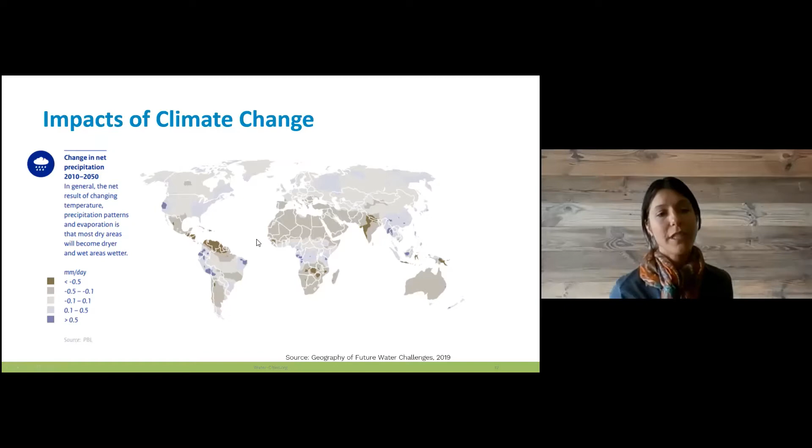Generally, the consequences of climate change are too much water, too little water, too dirty water, and increased needs for cooling and well-being of people in cities.

The three challenges of secure, livable, and sustainable growth cities, together with the three paradigm shifts of limited resources, growth and densification of cities, and the need to embrace uncertainty, are all addressed as a whole in the principles for water-wise cities. The IWA principles for water-wise cities are the expression of thought leadership of IWA members and beyond.

Water and urban professionals who summarized a shared vision of what sustainable urban water is. The principles now create a common language to share and learn faster across countries. Locally, the principles are being used to rally urban stakeholders around a shared vision on sustainable urban water, to strengthen the collaborative actions across disciplines and scales, and sometimes also across political parties.

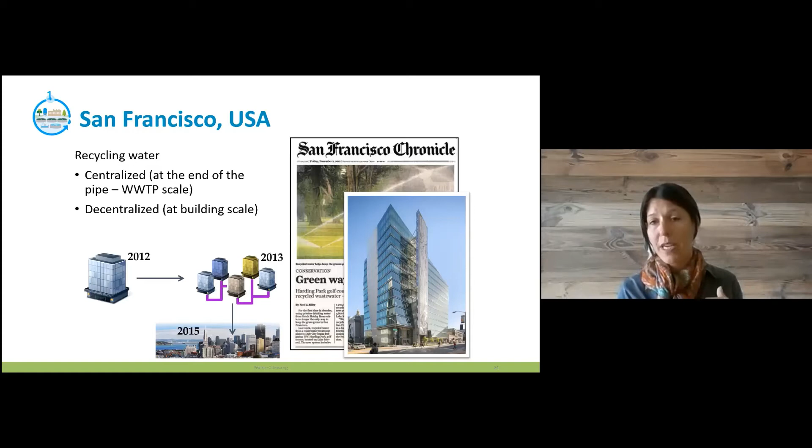And they've published a purple pipe and gray water recycling manual that is available now for all land developers working on new buildings. With this mindset of diversifying their resources, they're implementing rainwater and gray water recovery for non-potable uses, both at small and large scale. Recycling and rainwater harvesting on new large buildings has required the development of a whole new building code and collaboration with regulators to make the regulations evolve.

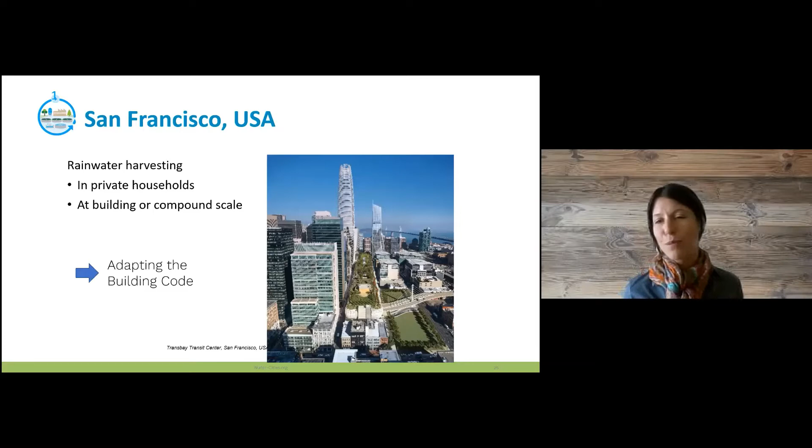We see that these strategies require us to rethink the way we design our buildings in cities, which naturally brings us to the second level of action. That second level of action is about thinking the way we design our cities in a way that allows us to embrace water as a resource for survival, for the essential needs, but also for well-being.

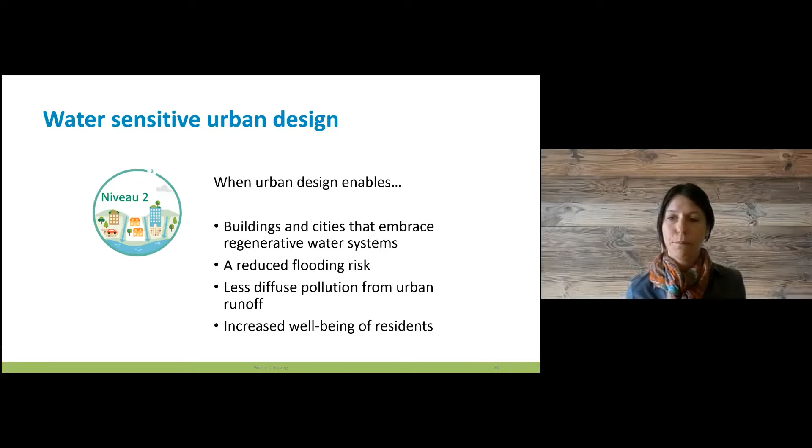Continuing our world tour, I'd like to take you to Sydney. The utility is an integrated water and sanitation utility serving 4.3 million people. Their challenges are population growth, declining water sources, and urban heat and flooding.

It's on that last point that I'd like to focus this example today. Sydney is facing the growing problem of urban heat and flooding. In response, they have developed their blue-green strategy which reduces heat and flooding and increases the well-being of residents.

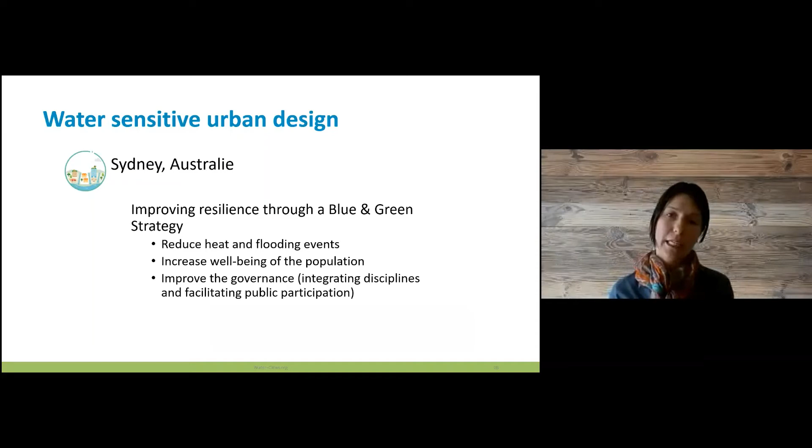It's divided into two complementary axes. The green corridors, whose overall objective is to increase the planted areas to decrease the urban heat. And the blue corridors, whose role is to support these green corridors and to increase the presence of visible water in the city. Now, visible water is important because it creates cultural and social connections.

And the well-being of the residents, of the population, relies on those opportunities. So water plays a role way beyond its cooling effect in the well-being of people, in the scenery it creates for people, and the sense of belonging to a place.

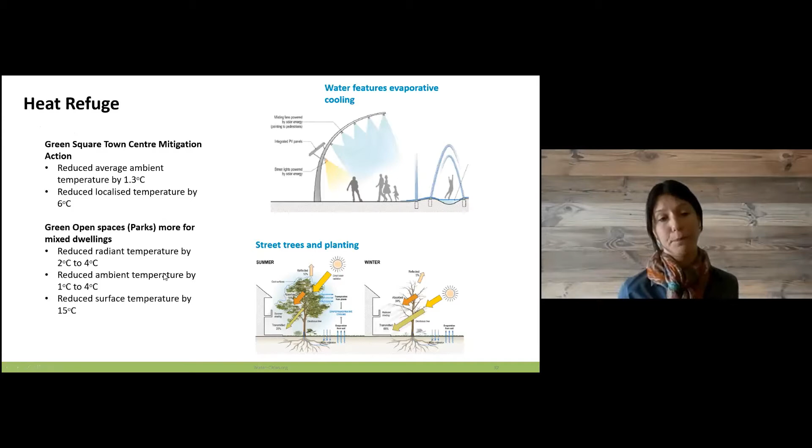And this is what it looks like in pictures. Now, to allow for so much green space in the context of a limited resource, the city has developed rainwater storage for park irrigation during dry periods. This rainwater storage also helps reduce flooding and limit stormwater overflows, which in return helps improve the water quality of the bay.

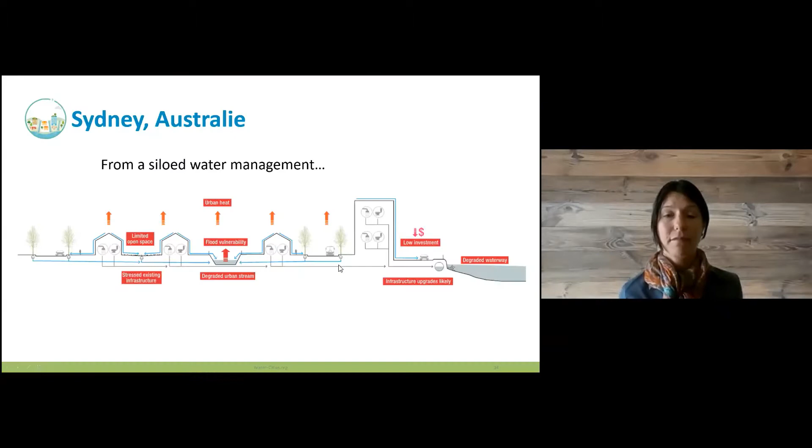Sydney is transitioning from the traditional silo approach to an integrated approach they call water-sensitive cities in Australia. It's about putting water at the heart of urban development and taking into account all the co-benefits that water management can bring. This type of approach allows increasing well-being and security in relation to flooding and water scarcity risks.

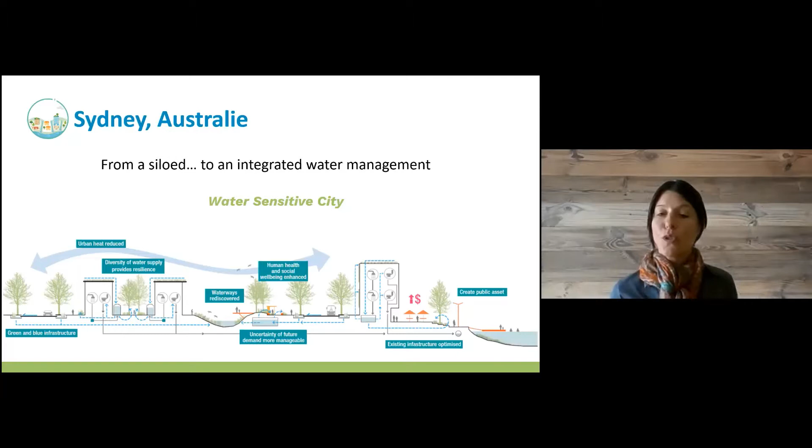But to truly ensure safety from water-related risks, the city must work hand in hand with its basin, which brings us to the third level of action.

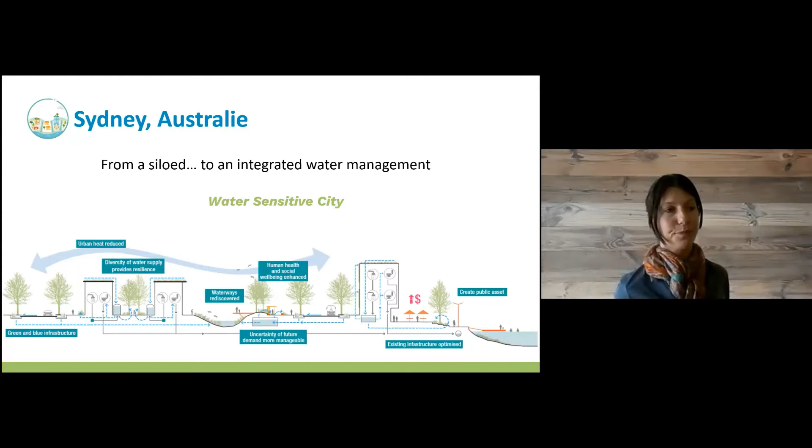A basin-connected city is when a city fully accounts for the capacity and water usages within its basin. That enables a better sharing of the resource, a better anticipation of the risks of lacking water or flooding, and it enables preserving the quality of the resource.

To illustrate this level of action, I'd like to continue our world tour and take you to Cape Town in South Africa. The utility there is a water and sanitation utility and serves 4.3 million people. Their challenges are population growth, informal urbanism, water resources highly dependent on rainfall, aging infrastructure, and social issues such as poverty, inequality, unemployment. But today, I'd like to focus on the dependency on rain for their water resources.

I propose that we go through what Cape Town had done to put in place some mechanisms before their 2018 drought, which we all still have in our heads, and then what they've also learned as a follow-up from this drought.

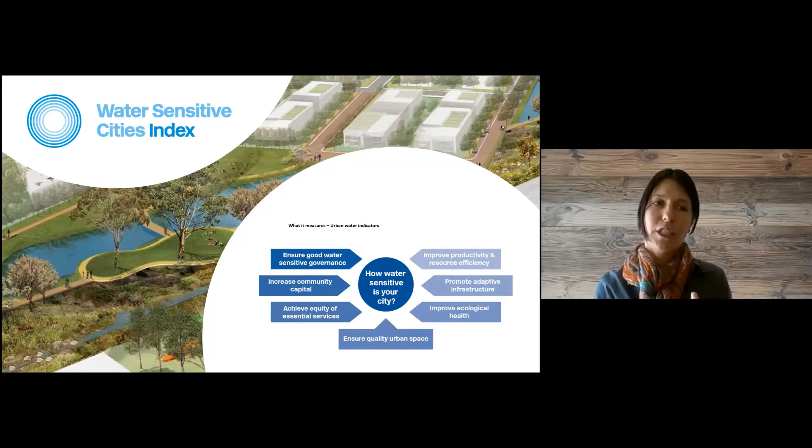Now let's move on to the Water Sensitive Cities Index. This index is articulated around 7 pillars: ensuring good water governance, increasing community capital, achieving equity of essential services, ensuring quality of urban spaces, improving ecological health, promoting adaptive infrastructure, and improving productivity and resource efficiency.

They started developing that framework based on the urban water transition phases concept. If you've already listened to some Australians presenting, you might have seen that graphic before. It's about thinking that our cities have evolved from being water supply cities back in the 19th century to water sensitive cities today, or trending to be water sensitive cities today. This evolution is the result of a series of social and political drivers listed at the top of that graphic, and the result is that we build different types of infrastructure in response to those drivers.

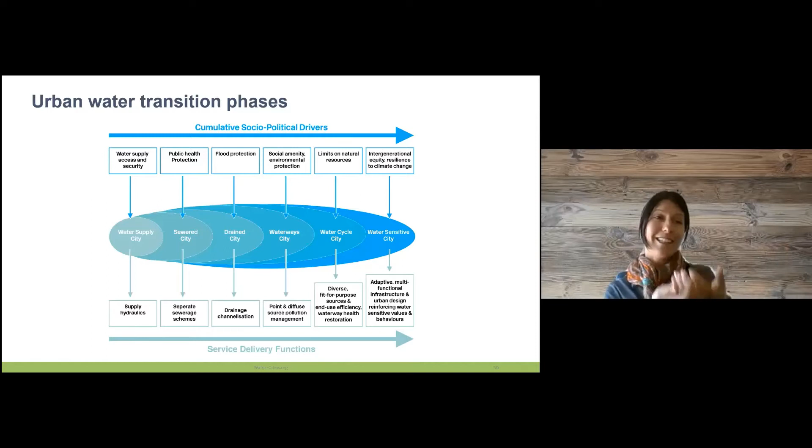And so the aim of this index, the Water Sensitive Cities Index, is to inspire change both in the social and political drivers, so that we build infrastructures that deliver water sensitive cities. It's about moving from exclusive large-scale centralized infrastructure and institutions to more flexible, integrated, and complex infrastructures and institutions, providing more adaptability, flexibility, and resilience.

Those urban water transitions from our current systems to water-sensitive cities rely on three pillars: the enabling structures, the on-ground practices, and the social and political capital, leadership, and learning.

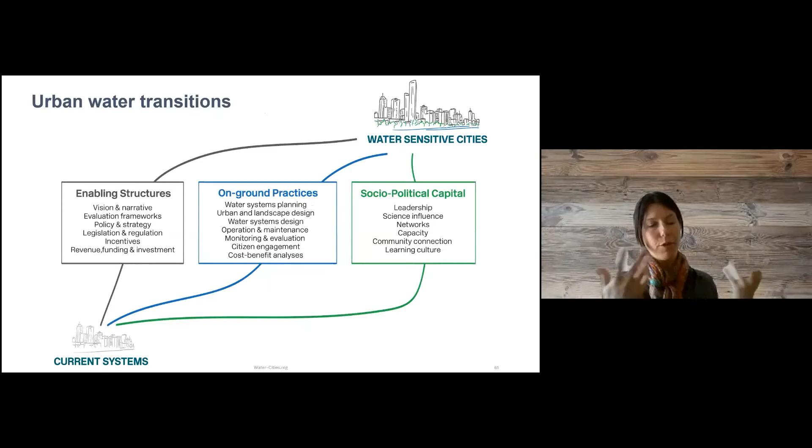The index is structured around 7 goals and 34 indicators. The first 3 goals are more about governance and wider water management issues. The next 4 goals are more about the infrastructures, systems, and services themselves: improving productivity and resource efficiency, improving ecological health, ensuring quality of urban space, the well-being part, and promoting adaptive infrastructure.

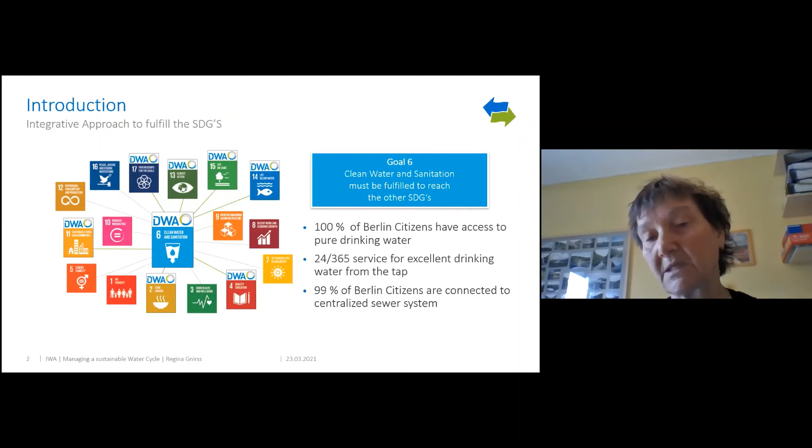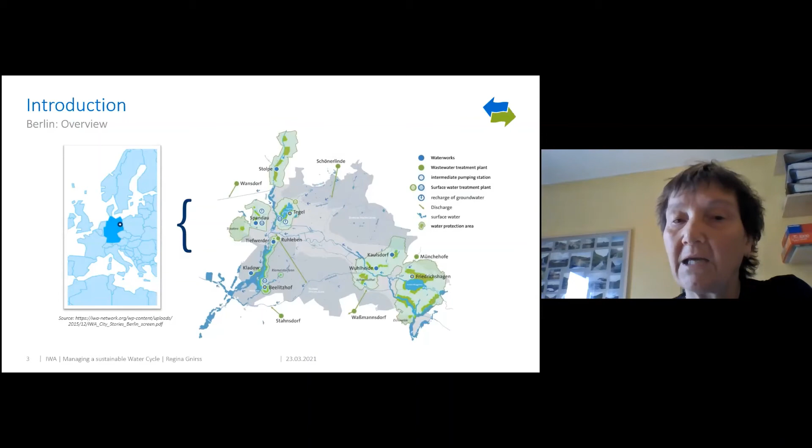You may have the question, why is that given? I can answer that at the end. However, it's important: if you want to rely on your source, you have to protect it. And Berlin gets 99% of its drinking water right from under the ground.

We've already heard the challenges for the city. Berlin is a growing, unified city. We have about 3.7 million inhabitants, and we still have a small city integrated into our water infrastructure. If you know that some of the city's infrastructure is more than 150 years old, you won't find a car that has been driving that long, yet the infrastructure is still in very good condition.

And even the oldest pipes last the longest. So if you have brickstone pipes, old doesn't always mean it's in bad shape, if you keep it in good condition.

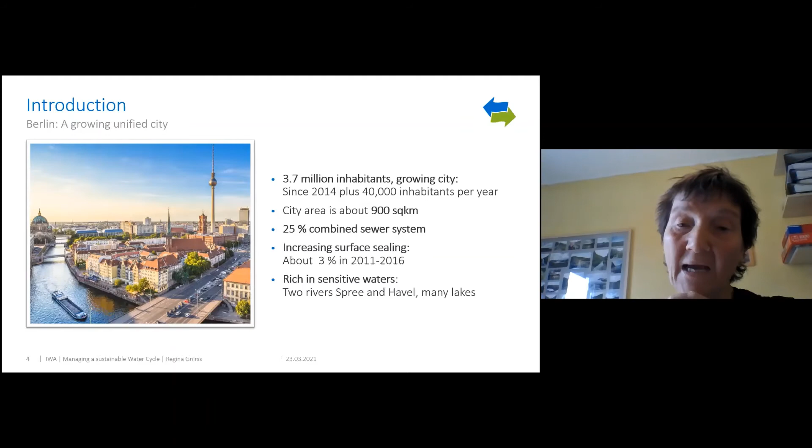The city area — you've already seen for sewer and sanitation, we are responsible for both water and sanitation in Berlin. We are also dealing with stormwater. In the older part, we have the combined sewer system; that's about 25% of the city area. However, in terms of pipe length, it's a bit longer.

If you traveled through our sewer system, you could travel from Berlin to Tokyo — just to imagine how much infrastructure you have to keep in shape. The increasing surface sealing is still an important issue if you look at climate change and the cooling effect for stormwater.

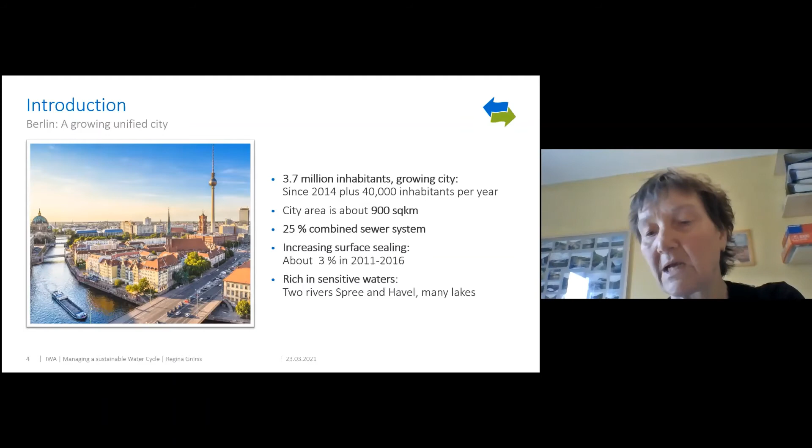Also in Berlin, we have two river systems, the Spree and the Havel, with rivers and lakes together. However, the water flow is just 10 to 30 cubic meters per second, which is a factor of 1,000 lower than the River Rhine, where, for example, Amsterdam takes its drinking water from.

So I wanted to talk today about the Berlin journey to become a water-wise city. I don't want to go into much detail because Corinne already explained it quite well. It's a very good approach that we transform the engineers we have, who are used to concrete, into water-wise systems thinkers. And I will show you that we do it with our people on site — if we really manage to leave the silo thinking, we are capable of finding new ideas together.

We do networking not just on the international level, but also on the European level, in architecture with Metropolis. We also collaborate closely with Paris, Amsterdam, Copenhagen, and New York. If we have things in common, we share the knowledge wisely. The German association you've already seen regarding the SDGs at the beginning is also a very strong issue, because all the directives are written down in this association.

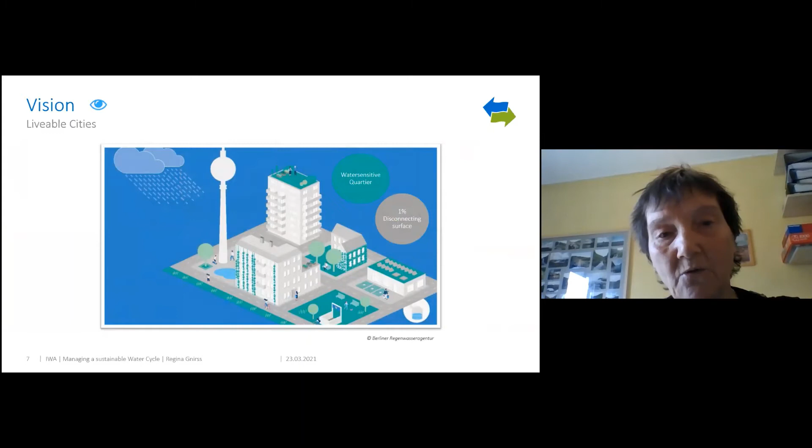What is a sponge city? I assume not everybody understands, so this graph will show you what it means for us architects and engineers. It means that we keep the stormwater, even if you have sealed the area in your Quartier. You have the chance to have green roofs that store the rainwater, and parks with swales where you keep the water. The goal is that you have less overflow in the combined sewer.

I have to admit that the stormwater which we get in the city is mostly not clean. You have to introduce some treatment, just to raise the issue of trace organics coming from the facades, from coloring, or from the roof material. In Germany, there's a number that about 50% of the pesticides are used in cities.

You already see the governance issues. In Germany, we follow the EU Water Framework Directive. I think that's quite a challenge due to the basin being connected, because you really look at a larger environment, not only your own city. It says you should avoid urban heat, loss of biodiversity, and poor quality of urban open space and surface waters. Therefore we have to apply sustainable integrated water resource management for high quality of surface and groundwater.

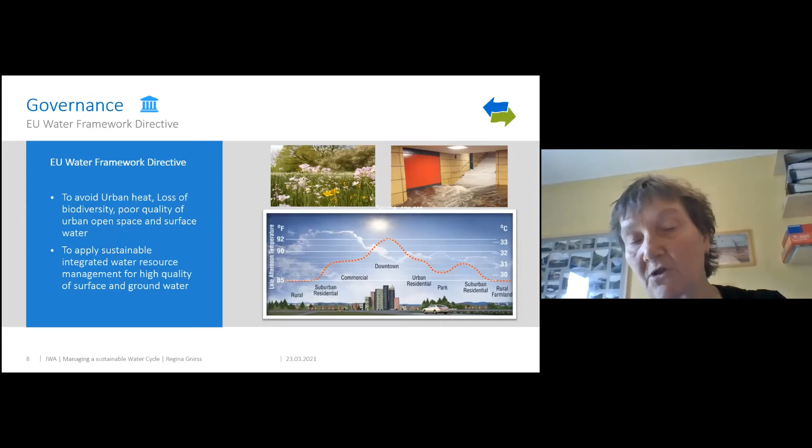You've already seen the curve by Corinne, that you have the highest temperature if the sun shines downtown. So you have to change the cities to have more green, to get a mixture with suburban residential areas where the temperature is much lower, and that goal can be reached.

So we already have the path done to protect our waterways for drinking water in a semi-closed water cycle. We've also done a lot in knowledge capacity building to avoid silos within Berlin, because we only have one city and we should have one vision for all infrastructure companies dealing with this city.

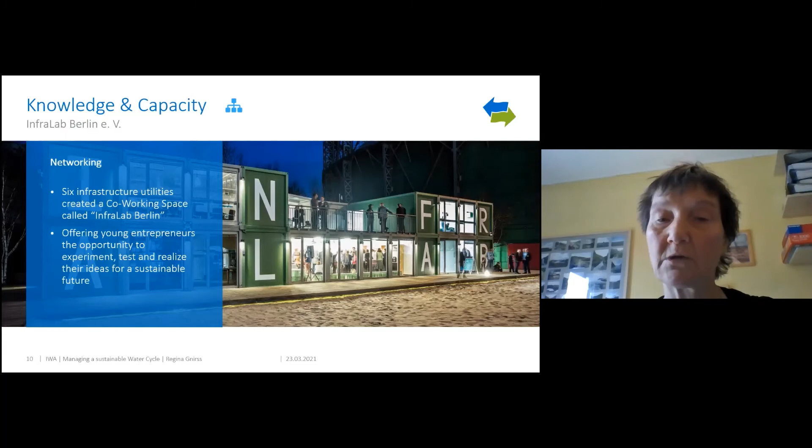So all six infrastructure utilities created a co-working space called InfraLab Berlin. We have meetings and talks and exchange projects, and we also offer young entrepreneurs the opportunity to experiment with us, to test and realize their ideas for a sustainable future. Again, we transfer conventional engineers into sustainable thinking engineers. That's a long journey, and it's important to take your employees with you.

We also use a lot of planning tools here. I just brought the example of load management. We explain to our operators what they can achieve if they use a centrifuge or the air blowers a bit later. We want to introduce as much regenerative energy in our sewage plants as possible.

So we signed the climate agreement with the Senate to reduce greenhouse gas emissions by 40% by last year, and we have a new one where we want to be climate neutral by the end of 2035. We have a lot of pilot plants running to make this goal a success. However, it's questionable because we have to increase our effort for trace organics, which consumes energy. So it's always like earning something, but spending more because of quality issues.

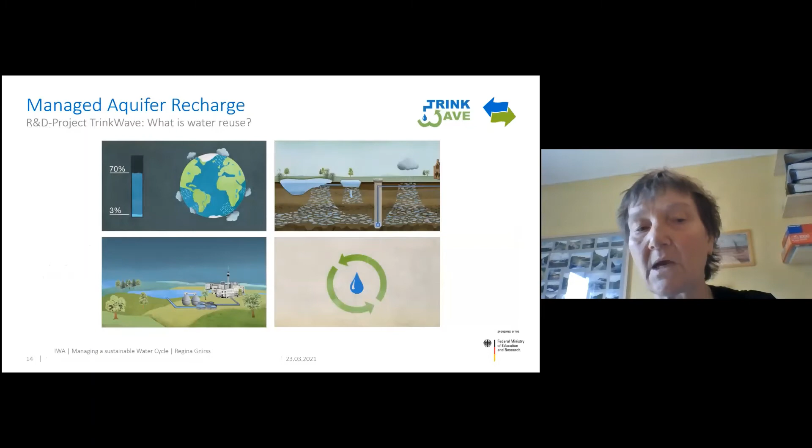I also brought a small movie with me from our R&D project TrinkWave, where we explain the water reuse, how it works for a large city like Berlin. I hope it will work and you will listen to the tone.

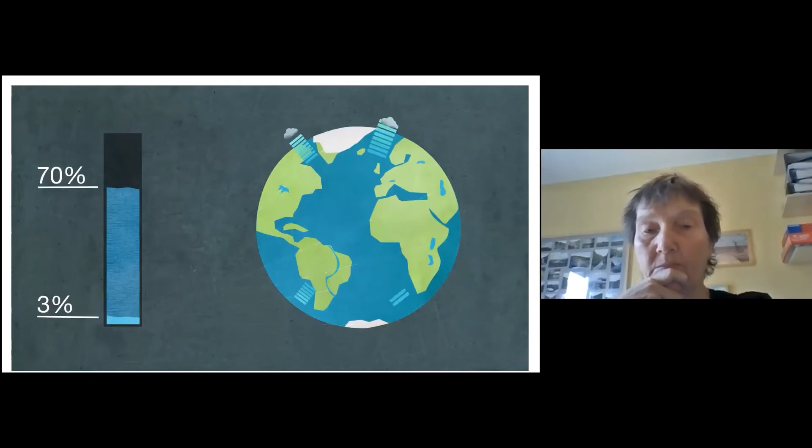Water is the basis of all life on Earth. It makes up 62% of our bodies, and water covers around 70% of the planet's surface. But only 3% of that is fresh water, which is constantly renewed through a cycle of evaporation and rainfall.

For us, it seems natural having instant access to clean tap water. In fact, all the water on Earth has existed for millions of years and has been reused ever since. All the water we use is cleaned after we use it and returned into the environment.

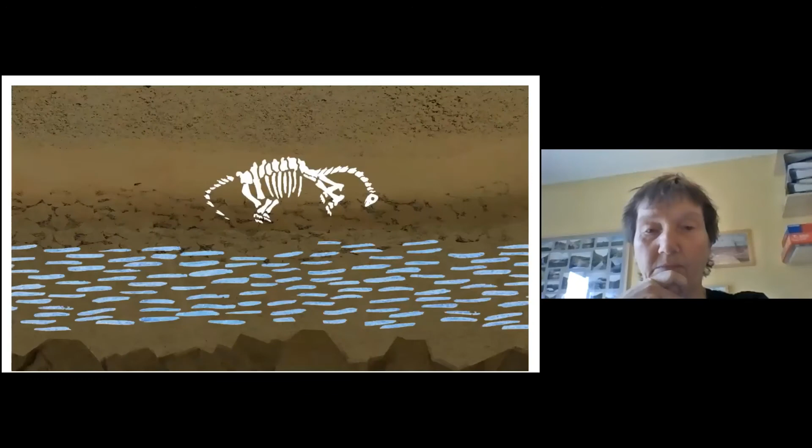For us in Berlin, water reuse is especially important, since our tap water comes from right here, just below the surface of our city. In water conservation areas, our drinking water is abstracted by sinking wells into the underground water. This groundwater is formed from rain and the seepage of water from rivers and lakes, also called bank filtration.

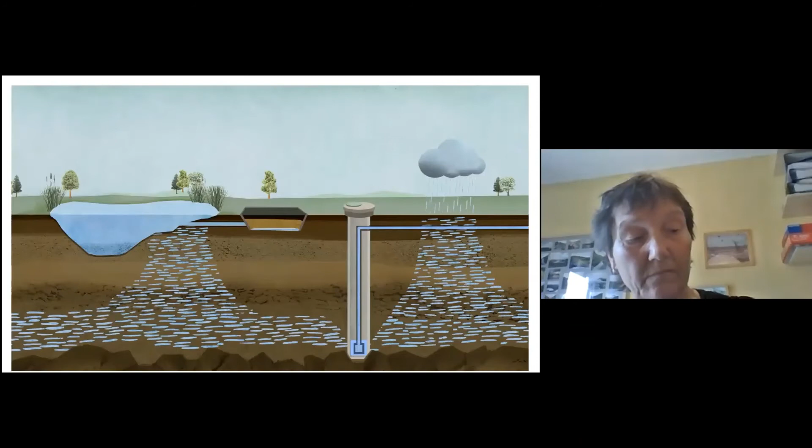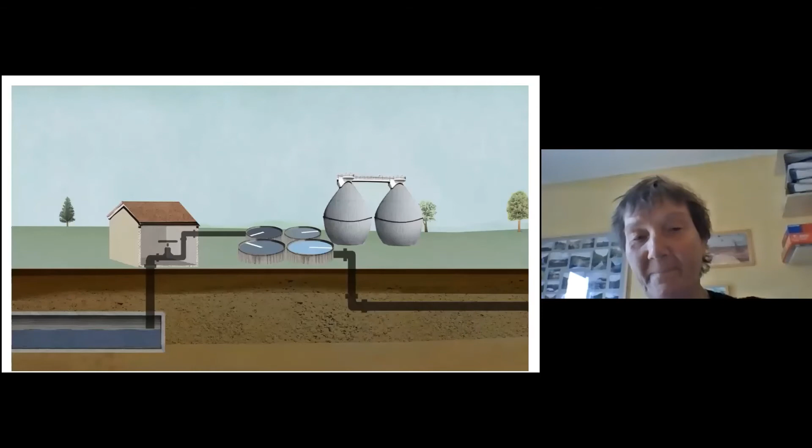Because the amount of naturally occurring groundwater is often not enough, we supplement it from surface water in order to meet demand. In our waterworks, we use natural treatment steps to produce drinking water and distribute it to households and industry. After use, wastewater is collected in the sewerage system and pumped to treatment plants. There, nutrients are removed before the water is reintroduced into the lakes and rivers, and through bank filtration, the cycle begins again.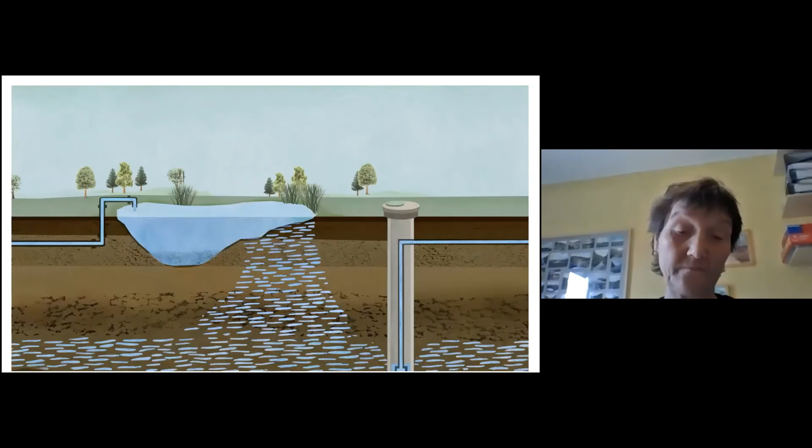Global climate change has a direct impact on landscapes and water resources. Droughts drying out rivers and lakes, woodlands turning to scrubland. Clean and safe drinking water is becoming increasingly scarce. As well as all that, cities are growing larger and need more drinking water. So, what can be done?

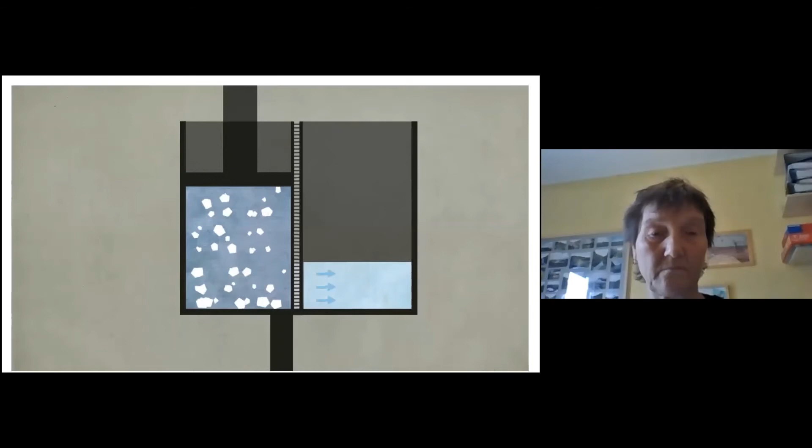We are working on the Drinkwave project, together with various partners who are experts in water reuse technologies. Technical processes such as high-pressure membrane filtration require a lot of energy and produce concentrate streams which are hard to deal with.

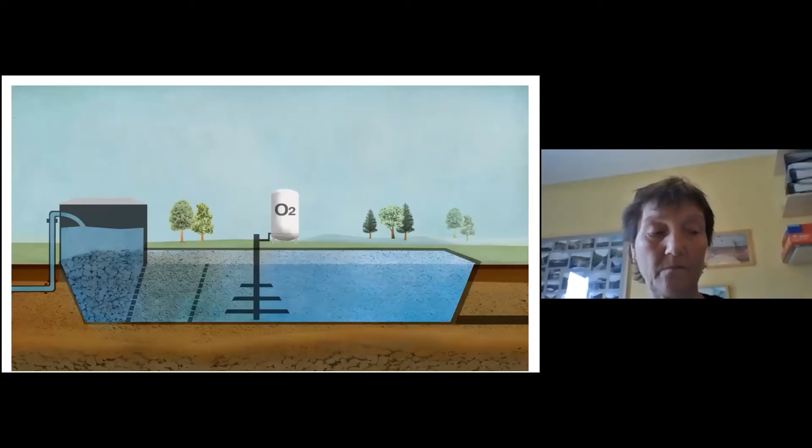With Drinkwave, we're testing a resource-saving and natural treatment system, SMART, a sequential managed aquifer recharge technology. With these modern techniques, we can ensure that the water of today continues to provide the safe drinking water of tomorrow.

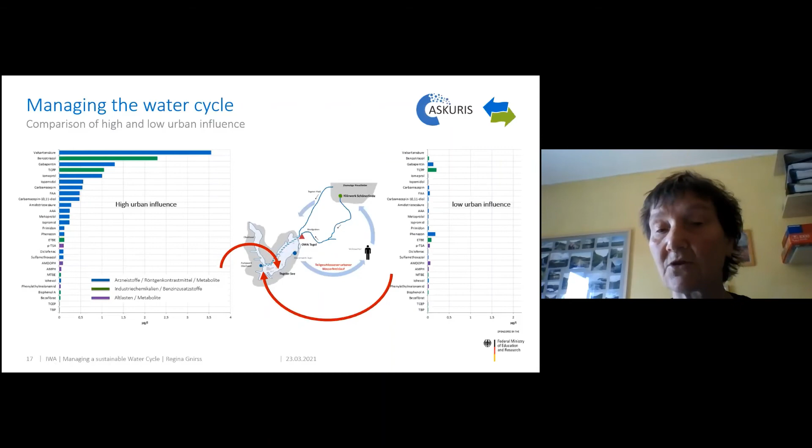However, we are convinced that we should look at our sources, so treatment at the sources - that's medication you see here. If we use less medication, that could also help to prevent compounds entering the water cycle. I think that is important for water-wise communities: to be aware of what you use and what you put into the water cycle, because water is not consumed like energy, but water is only used, as was clearly shown in the picture, in the movie.

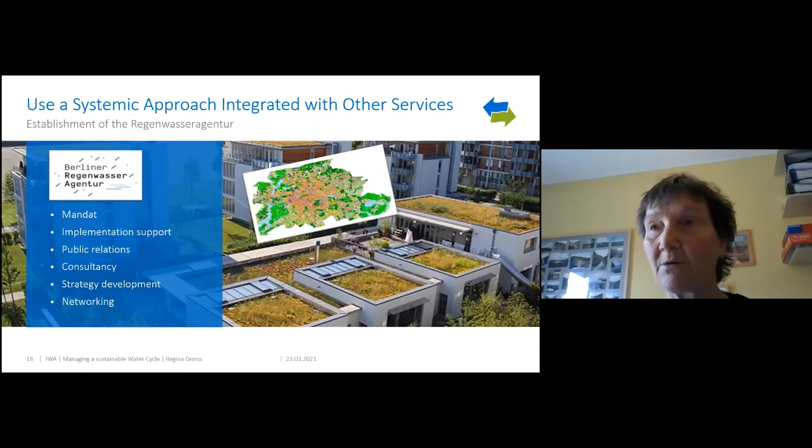What we use for a systemic approach with our other services here, is the example of Berliner Regenwasseragentur - that's also reality, the buildings you see here. The district already fulfills the 1% I've shown in the beginning. We reached that just by a clear mandate with the Senate of Berlin and Berliner Wasserbetriebe working together. We have a clear implementation done. We have public relations built up to explain it in private and also in consultations. And the networking is going on.

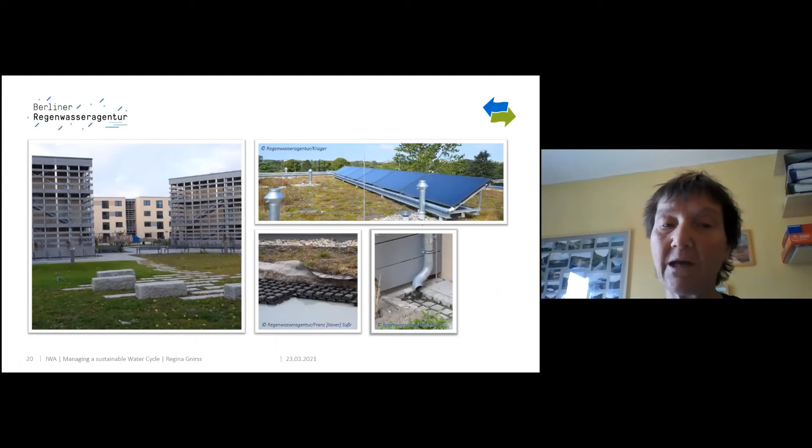The last case study we implemented in our water-wise journey, I really want to make advertisement for our early warning system, which is unique in Germany and also in Europe. It really works on a measurement in surface water for bacteria. We have a risk-based prediction model for hygienic quality parameters, and we are really able to warn the people with a very simple traffic light system on a web-based tool, if they can go swimming or if there was some spill off by a stormwater event. And the time is exactly calculated if there is impact on the bathing site or not. So a clear suggestion to the people to use water carefully, a clear suggestion, enjoy swimming. However, we cannot ensure it for 100% of the days, but we want to warn you.

Yeah, that's our journey in Berlin. I hope I could cover some of your questions, and I thank Corinne for choosing Berlin as presenting how the journey is. It's exciting, however, it's challenging, and we don't fulfill everything what we have in our mind. However, we are on our path, and it's a good way. Thanks a lot.